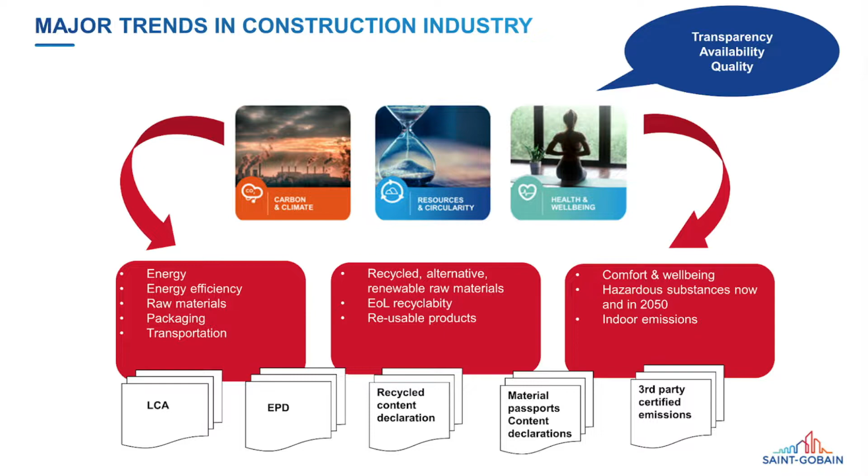And when it comes to health and well-being, if we talk about hazardous substances now and in the future, and those in the past, asbestos used to be a really good construction material, but it's not anymore. Products or combinations of products without hazardous substances are much easier to recycle at the end of their life cycle.

But what is the big thing here? There is a lot of documentation and many topics, but the need for information and the need for transparency grows at huge speed. The data and information have to be available and of high quality.

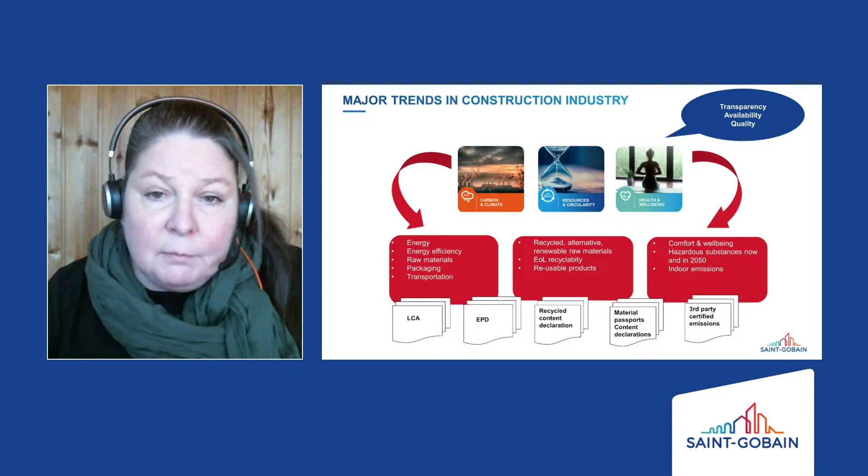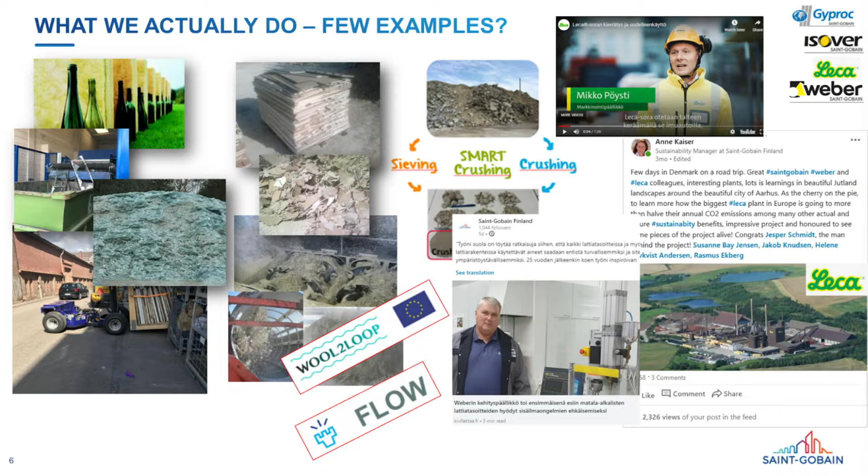And just a few examples about circularity and recycling, what we do. I will focus more on carbon today. The glass wool we produce in Finland in 2 plants contains 60 to 80% recycled glass. We are the biggest user of recycled glass in Finland, and we are also creating new streams for recycled glass all the time. And when we talk about gypsum boards, the Gyproc board contains approximately 20% recycled gypsum, and we could now increase the amount up to 30.

But then to go over 30, it requires investment in our Kirkkonummi plant. But I'm pretty sure we have that already planned on our carbon and sustainability roadmap.

And when we talk about the Weber and the industrial mortars, there we are very active. We are looking for alternatives for the aggregates and the binders. We are looking for alternatives for sand, and we are trying to find replacing combinations for the binders. There are many cementitious products we do, and actually cement has a pretty big impact when it comes to CO2. So we need to find low carbon solutions for cements.

But just to tell here, the cement is many times demonized because it has big CO2 emissions, but I have been talking recently with pretty many suppliers of ours. So there's huge work going on with the cement suppliers, and I'm pretty sure that within 5 years, the 30% emission reduction is possible.

And talking about the carbon, of course, we have to remember that there's the bigger picture of corporate social responsibility and sustainability behind here. So we talk about equality, many other things, local value creation. But today we focus on climate change and circular economy mainly.

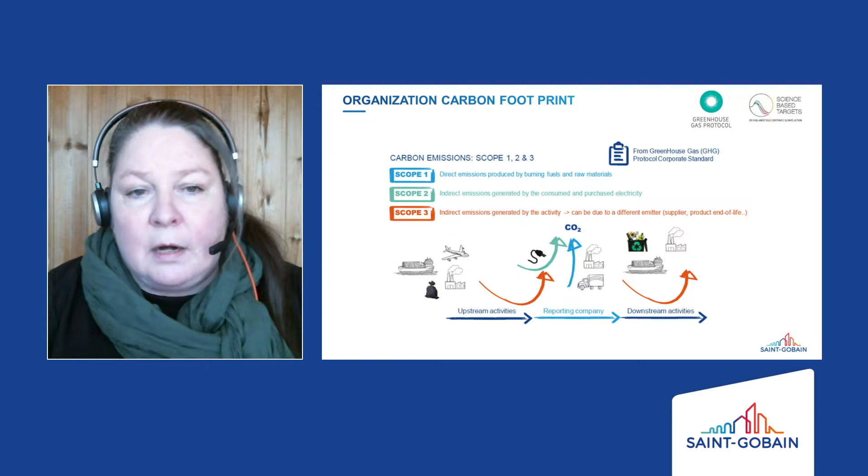I'm not going deep into the greenhouse gas protocol, but it's the standard for calculating an organization's total carbon footprint. And for Saint-Gobain Group objectives with carbon neutrality, our objective is verified and approved by the Science-Based Targets framework. When we talk about the total carbon, we have the direct emissions, and then we have the value chain. The value chain is actually the biggest part of our total emissions.

But if you look at scope 3, all those categories we have calculated into our total emissions. So when many industries are talking that they are carbon neutral, many times the discussion goes only on scope 1 and scope 2. And the value chain emissions are hidden somewhere behind, but that's actually where the major part is.

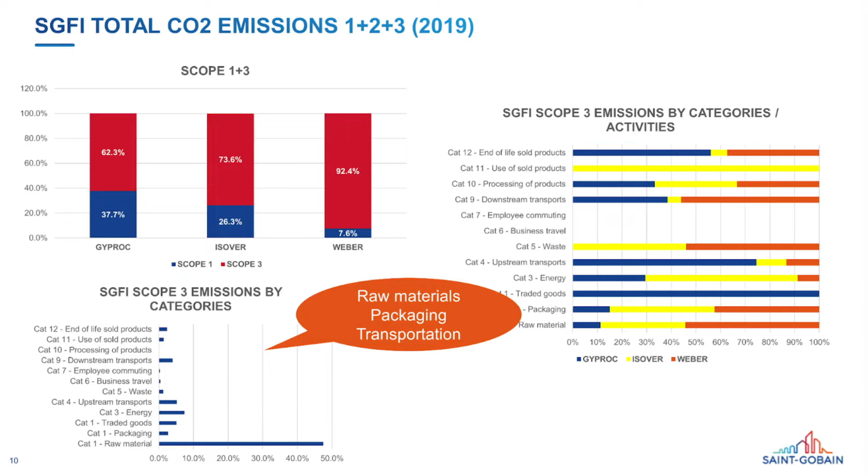And we have decided that we prioritize raw materials, packaging, and transportation in the first instance. Of course, later on, we have to focus on many, many other things. And this is, let's say, the first carbon roadmap we created last spring.

So I see here somehow like the snowball effect, that we go a few years further, so the speed will increase and many things will happen. And then we will see how much will be left in 2035. And of course, this roadmap is evolving. We will learn something in the meantime. We will succeed in something. And it's very, very interesting to see what will happen in 5, 10, 15 years.

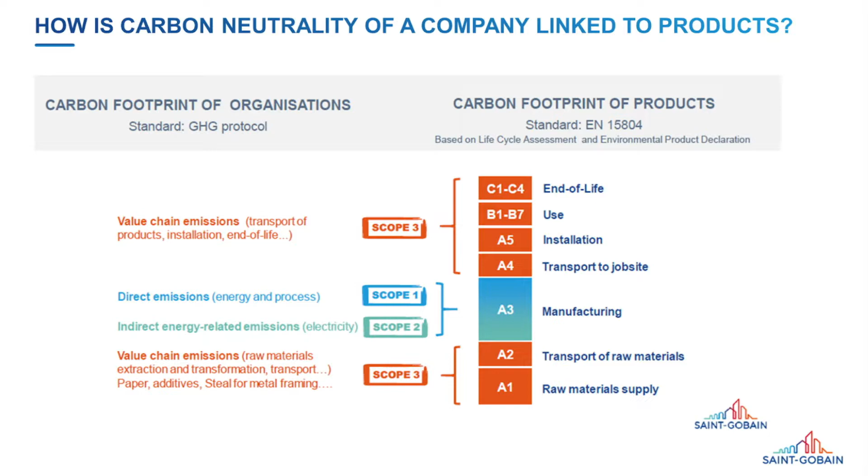And somehow to say it, we are not trying to reach carbon neutrality just because we want to do that, just because our owners are requesting it, but it's actually linked to our role in the construction value chain. Our role is to help our customers and stakeholders to reach their own climate objectives, and to help the whole society to reach a carbon neutral built environment. And any actions we take in our organization to reduce our total emissions are reflected directly in our products' environmental product declarations, the so-called life cycle environmental and climate footprint. So if we change raw materials, we can lower the carbon footprint of our products.

And as you saw, there was a total CO2, and then I spoke about the EPDs. So EPDs are somehow the proof of the work we do in decarbonizing our own operations and helping our customers to decarbonize. We have pretty many EPDs, over 1,500 in the whole world. In the Nordics, we have over 400 EPDs, and we measured the share of our turnover covered by EPDs this autumn, and we are reaching pretty high there. And I know there are many EPDs done also in Lithuania for Weber, in the Baltics, and we are preparing EPDs on demand for a few products that we are exporting to Estonia and the Baltics.

And what is important here, if we talk about EPDs, it's not only the carbon footprint that can be found there. There are many other interesting topics as well. But important is that the EPDs are done according to the EN 15804 standard. It has been updated recently, and from next year, only the A2 versions can be published. EPDs need to be third-party verified. They need to be published on an EPD operator platform, and they should have the whole life cycle in them. And especially A2 is pushing for this.

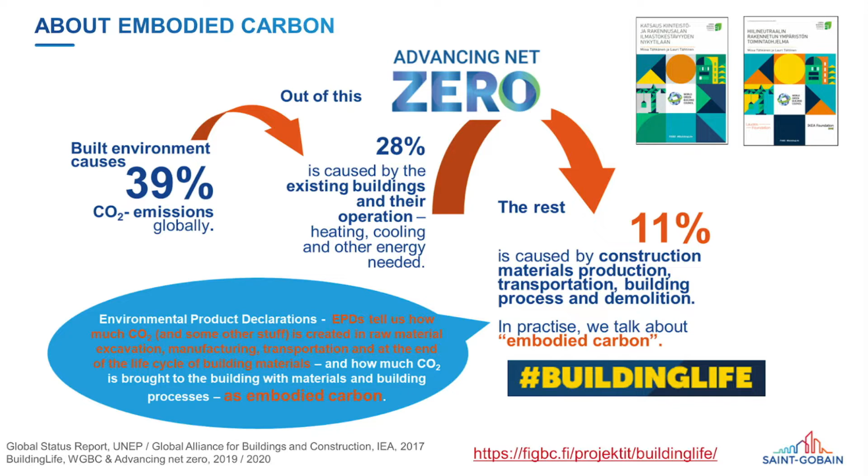And in the upper corner, you see there are two publications, two reports in Finnish. Sorry, but you can find them on the Green Building Council Finland website. So that's a very interesting project called Building Life. It aims to reduce the embodied carbon in buildings from 2017 to 2030 by 40%. And we are a very active partner in that project as well. But take a look at those, they are very interesting.

And of course, we are entering to discuss carbon neutral buildings. I will talk a bit about the regulation that will come. So regulation is something that puts the big picture in place. But then if we talk about very ambitious building owners, for example, they are doing much more ambitious work at the end of the day, not following only the regulation. And then we go there, how do we have carbon neutral buildings over the whole life cycle?

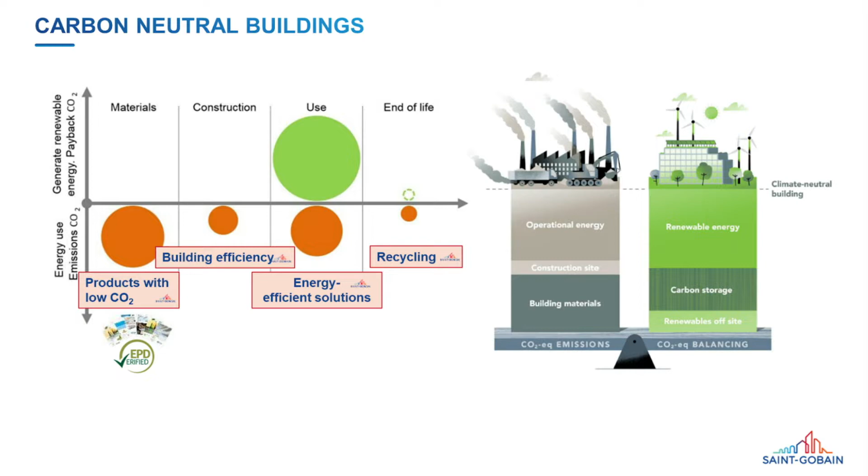And when we made this study, of course, there are bio-based materials. We cannot have all the benefits they have. But what I can proudly say is that our Isover glass wool has nothing to be ashamed of compared to cellulose insulation, for example. The difference in the emissions is really marginal. And last summer, we thought about this, that okay, those studies were pretty big. They were a bit expensive as well.

So I hired 3 students to make us some more developed data. These 3 students have been calculating, using the One Click LCA tool and Excel, 985 different structures that Saint-Gobain can offer. And we now have this huge data. We have the CO2 emissions in kilos per square meter over the 50-year life cycle of almost 1,000 structures. And now we have made the first step.

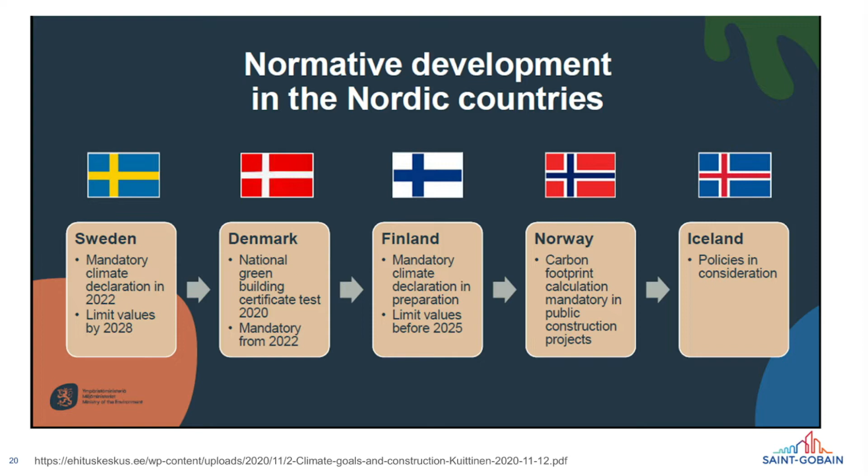And now the data has been gathered also for the limit values. What could be the limit values for the different kinds of building types? And this work goes on, and it's estimated that we should have these limit values before 2025. We had this climate declaration methodology in public hearing. Many comments have been given on how to make the system work better and what kind of changes should be done there. So it's very hard to say when we will actually have it in place, because so many comments were given on this documentation.

And so far, in this Nordic group, there has been collaboration on the national emission database between Sweden and Finland. So there is a very nice CO2data.fi database on the internet, and it's also in English. So take a look and check, but that's generic data that the Ministry of Environment wanted to provide for users who are calculating the whole building life cycle. And many other discussions are going on, and many studies have been done across the Nordic countries. And here you can see what is actually going on and coming in the different Nordic countries.

So in Denmark, they already put the limit values in place. In Finland, we are aiming to have the limit values and the climate declaration. It's under development, and as I told, 2025 will be the date when we have all this in place. There is no requirement for a specific LCA tool, and that actually makes sense. No public authority can push for any commercial tool, but it's rather the methodology that needs to be validated and given to the industry.

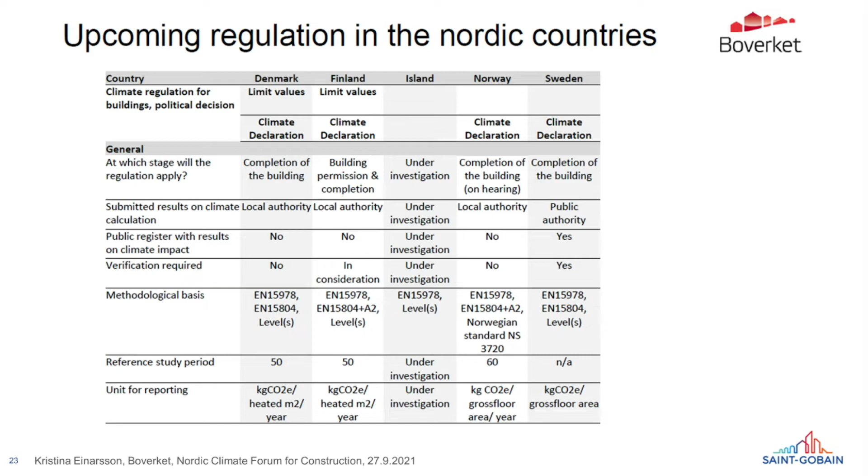So I'm sure that we need guidance on interpretation, how to deal with two different versions of the CO2 data in the future. But that's something for the ministry to think about, to help the industry implement this climate declaration. And the life cycle is more or less 50 years, and a lot of discussion has been going on about that as well. But of course, you can also calculate on the actually planned life cycle of the buildings.

And I mentioned this database and the EPDs. So the ministry provided the whole industry a generic database. The database is based on actual data. We have been working in tight collaboration with SYKE and the ministry, who were preparing this database. So we have totaled what is the actual emission level of our products and of many other industries and many other construction products. And then they have made the generic value, the average for the Finnish market. And then there's a conservative value that has a factor of 20% extra.

So it means that if you don't use specific EPD-based data and you don't know what products you are going to use in your building project, you should use the conservative values in the first calculations. Of course, later on, you know what materials were used, and then you can actually make a more specific calculation.

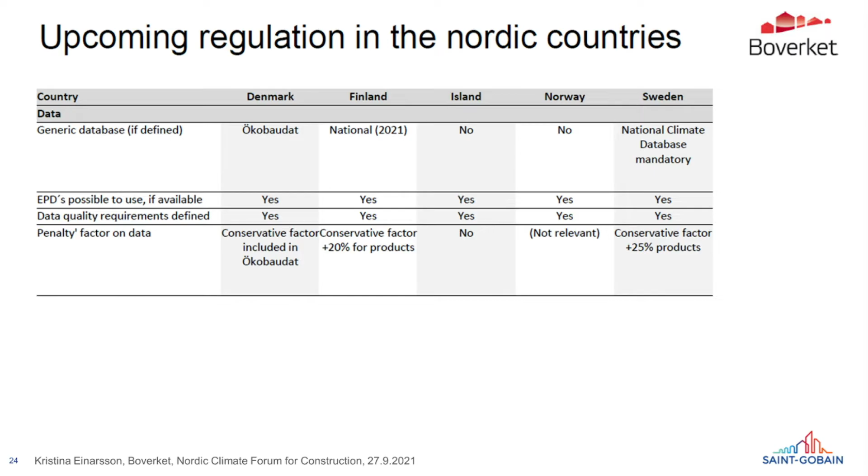And one topic that we have been discussing a lot in different forums is that if you have a certain figure related to the building permit, and then something changes along the way until the building is completed, and you go over the limit, what happens? Will there be some sanctions? I doubt anybody will demolish the building because of this, but there are still pretty many questions that we need to solve.

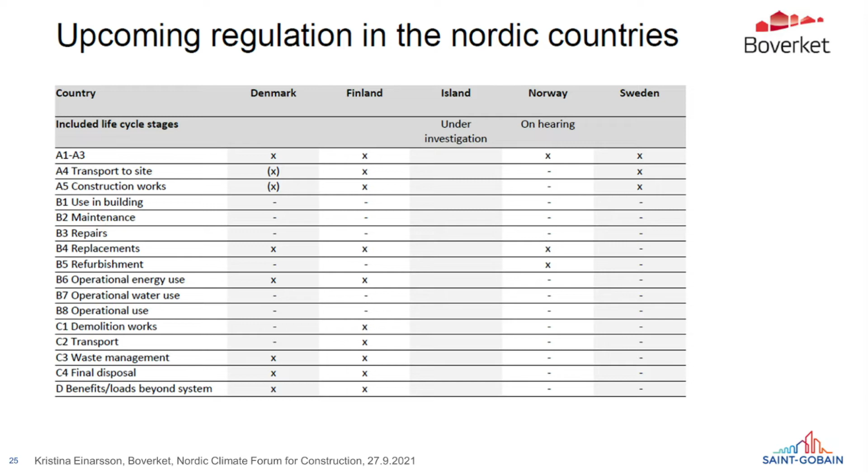And talking with some big building owners, they tell us that, okay, if this climate declaration requires only some part, not the underground structure, they will anyway calculate the total building with the underground structures as well.

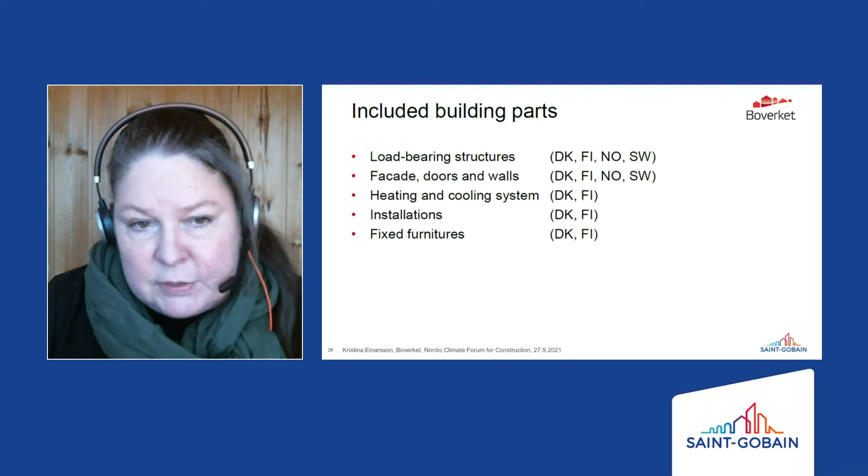And so it's not only about the footprint, it's also about the handprint, and that is included in the Finnish calculation methodology. So what are the benefits that the building can offer when it's built, that would not take place if the building was not built? So there are the carbon storages. Is it wooden construction? Is it some new technology, something else? There's carbonation. And of course, if renewable energy is produced on the plot, on site, that can be calculated as well. And any benefit that comes with the circular economy can be put into the handprint.

And these are pretty new slides. It was actually at the end of September, at the last Nordic Climate Forum. Matti was presenting some first ideas on how to set the limits for buildings. It's not that easy and straightforward, but there can be some thinking related to the national climate plans, energy mix, or climate conditions. And it goes from the big picture to the smaller picture. And there can be different values: a reference value, a limit value, and a target value.

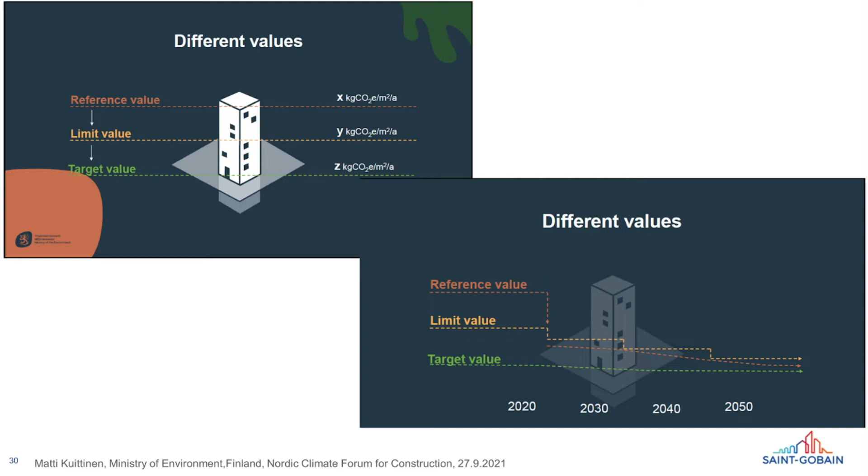And there's an example of the Danish limits. So I see that first you put the limit value somewhere, and over the years it will be lowered to get more ambitious, and at the end of the day really reach a net zero carbon built environment.

And there has been a nice study made by One Click LCA on the CO2 footprints of different building types. This has now been studied, and nothing has yet been decided. What was written very big in Matti's presentation is that these are just the first thoughts. These are nothing that the authority or the ministry is actually proposing now.

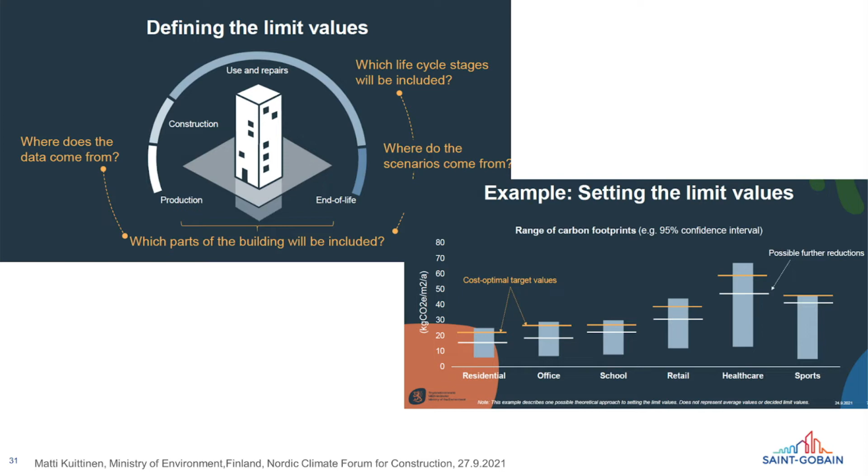But in defining the values, there are questions. Where do we get the data? Which parts of the building will be included? Where do the scenarios come from? And what life cycle stages should be included? Is it all, or do you have to narrow the focus and put some limits somewhere?

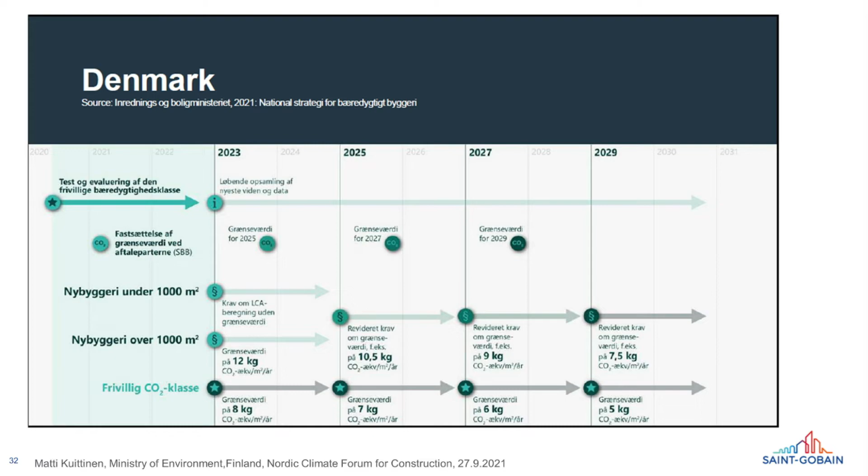And this is the example of the Danish limit. You see it's all for the new buildings over 1,000 square meters. So now you have this 12 kilos of CO2 per square meter in a year. And then there's the voluntary CO2 class that is still lower. But you see here that actually the limit value goes over the years and it gets smaller and smaller. It will be interesting to see the results, how quickly Denmark could reach that 7.5 kilos of CO2 per square meter in a year.

And this is what I mentioned. So it's based on this One Click LCA report, and these are just the first ideas. But it's interesting to see how different buildings could have different limit values. And what is important here also is that now we are not talking about the small one-family homes yet, or any summer cottages, but of course that can one day be the question.

Okay, so from those limit values, I really like this idea and the way we are going. So we should really think about the carbon budget. Is it the global carbon budget, or the country carbon budget, or the city or the whole built environment carbon budget? And what will be the carbon budget for individual buildings, and how will the world change in the future?

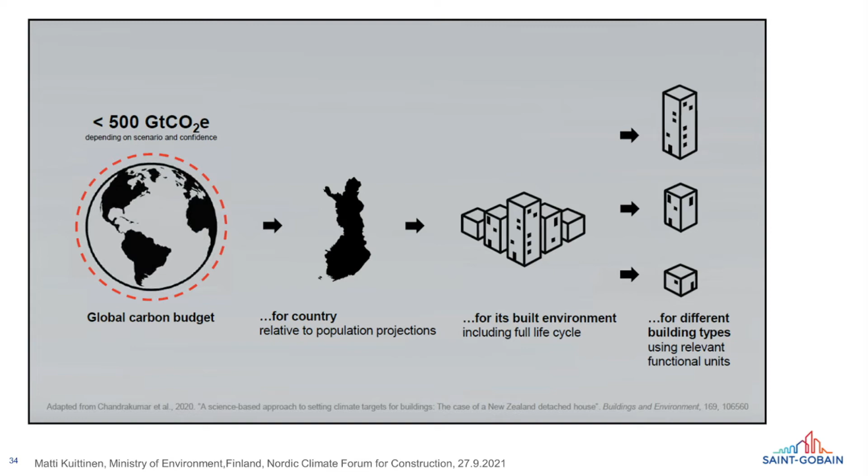So I know that there are ambitious building owners and contractors. So I guess that if now we are talking a lot about cost optimization, I'm pretty sure CO2 optimization will come into the picture as well. And whatever is there, calculations, data, setting the limits, digitalization has to be there as well. We can't handle all that data without having the proper tools.

And just to close up, it's not only the carbon. Even if we talk about carbon and circularity a lot, the built environment is a very regulated industry, and we should not go into sub-optimization. We need to keep the health, safety, euros, the performance, the long-term durability, and the functionality of the buildings in our minds, and not go sub-optimizing only by carbon or by circularity. It's a big picture where many things need to fit together.